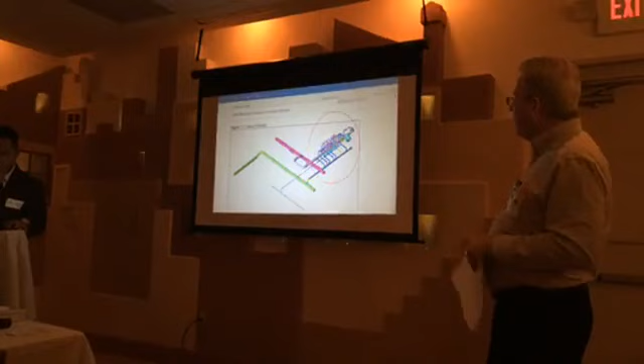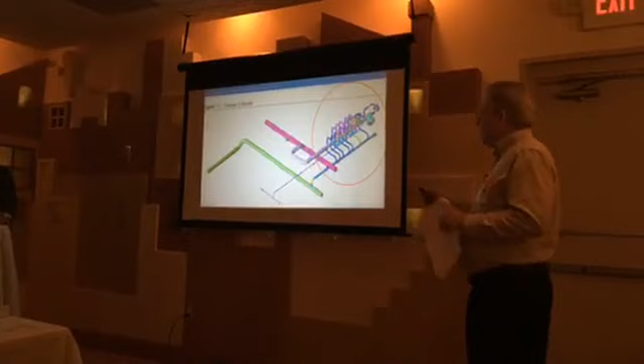So the next slide is showing the system in hand. This is actually part of the compressor system, and it goes to air coolers. It's a very large model. And you can see the PSV is sort of down the end of this. This is actually an end of a header, and then we have this PSV system. So to put that all in the other calc is really not an efficient way to do it. It's isolated. So this is what the system looks like.

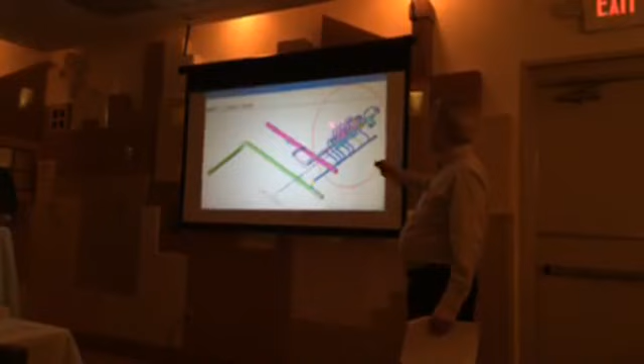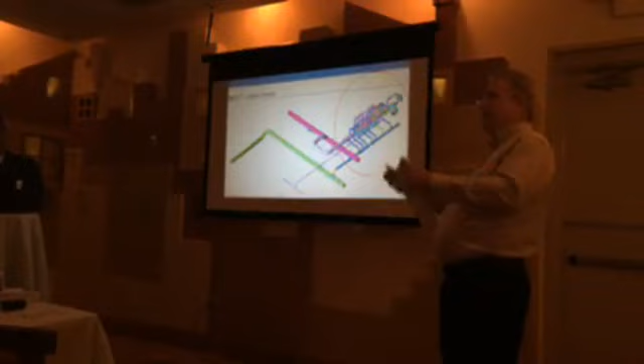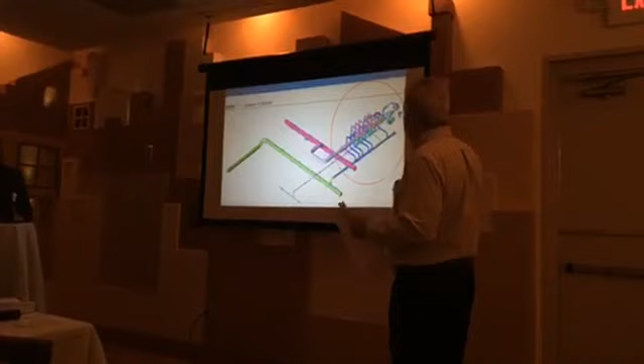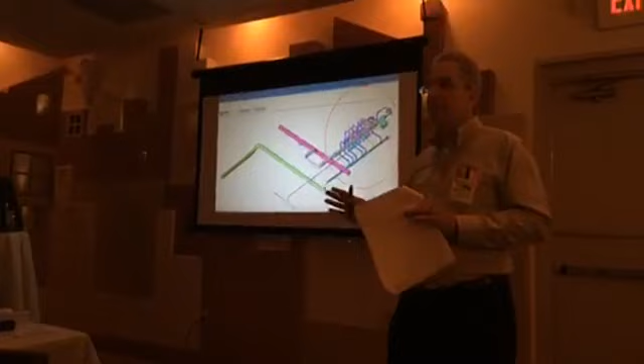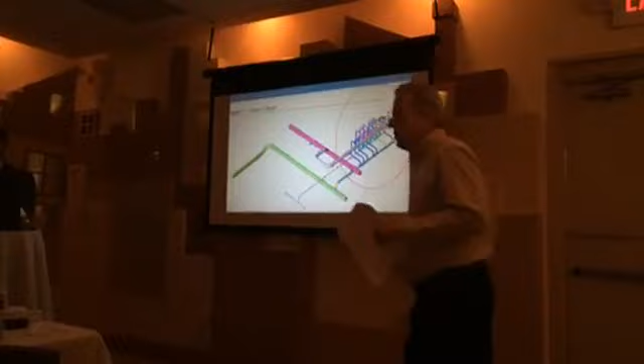And when we talked with Process about that, we said, well, these forces are large. We were calculating close to 20,000 pounds each, horizontal forces. And you got 5 of them, so we're going to say, okay, we're going to give Civil 100,000 pounds up here on the top of this structure. We'll show you some pictures later where it was, and we just don't have this system.

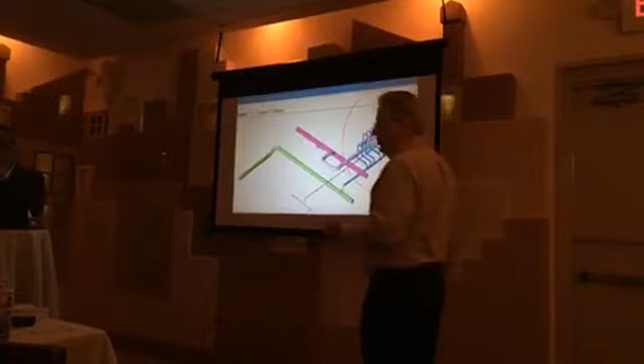We got 3 other ones that are similar. They're not high pressure like this, but the flow rates were the same, and basically the forces are proportional to the flow rate, so it doesn't matter the pressure. So we said, well, then we just talked to Process, and it's a very simple thing. Just walk over, talk to these people. We know these things are staged.

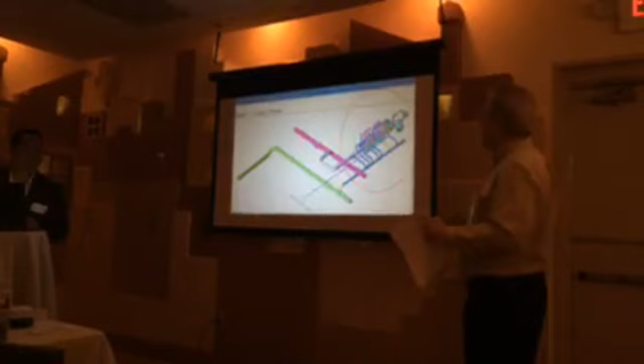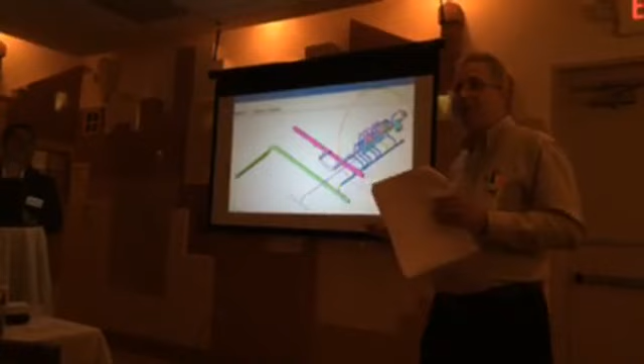The way this has worked is that the inlet pressure was 1100 psi. That's 1100 psi, so it's a high pressure system. It was a class 600 valve. So they said we have A and B that are set at the set pressure of 1100 pounds. Then they can stage it. You know, they have their ways of sizing things.

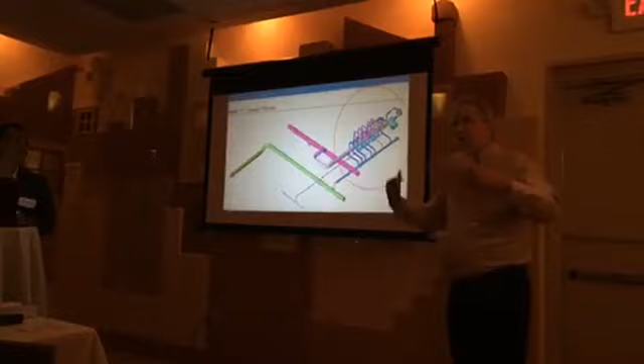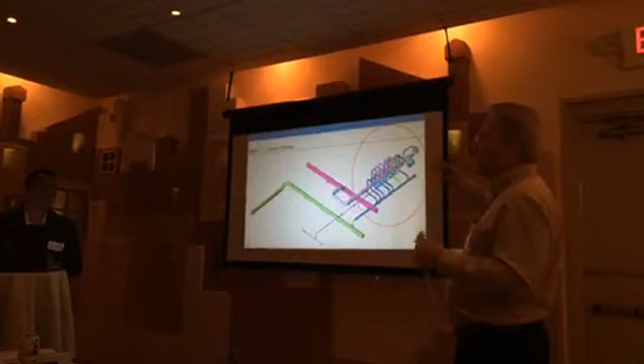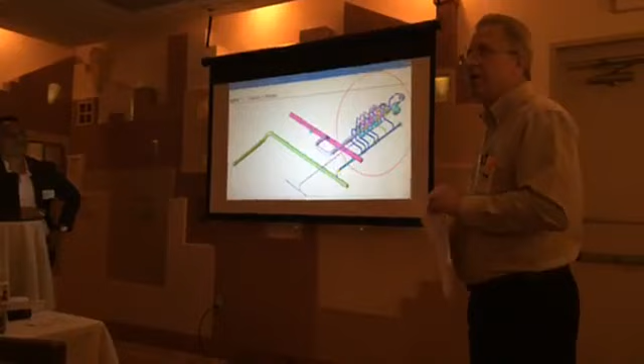And so the C valve was set at 1125 pounds. And then the D valve was set at 1155 pounds. So they gradually step in and they size them accordingly so they can pass the flow to reduce the pressure. And then the E one is set just like the other ones at 1100 psi, and that's closed. They car seal close it. The valves are physically closed on that. So that's what it looks like.

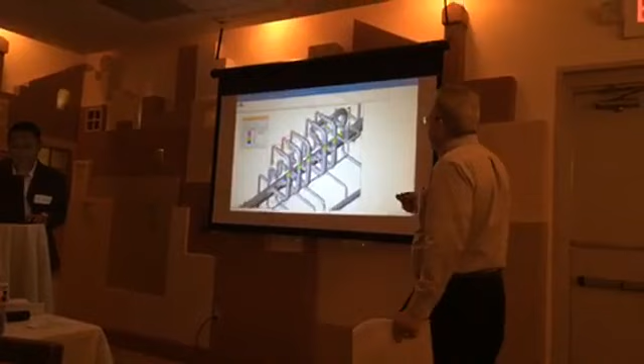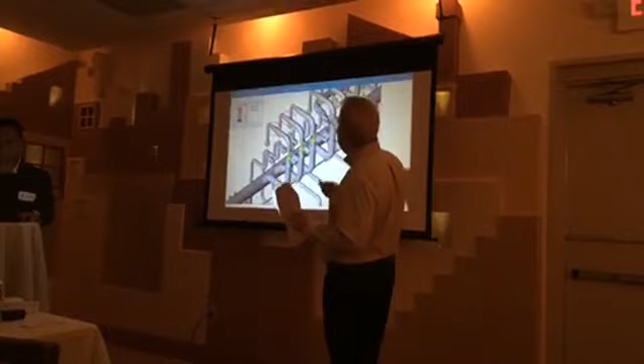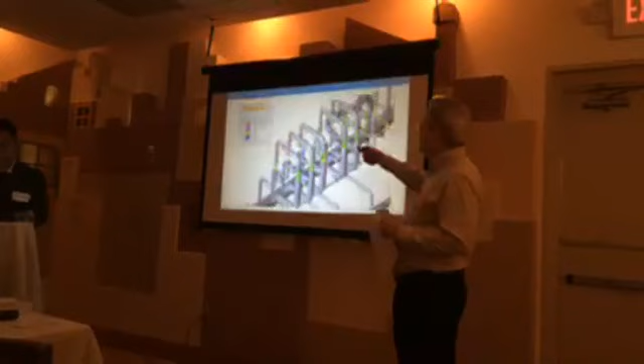If we go down to the next portion, there's a blow up of it, and looks like the circle's got a little shifted, but right in here, this is where we applied the forces for the first load case. I'm trying to show the loads there that we used, about 18,850 pounds. So say about 19,000 pounds was what we decided to use there. So when we ran this one case, we had the two 19,000 pound forces on there. And we treated it like an occasional load. I didn't want to get into all the load cases at this time, but it's an occasional load where we're going to put those on the system.

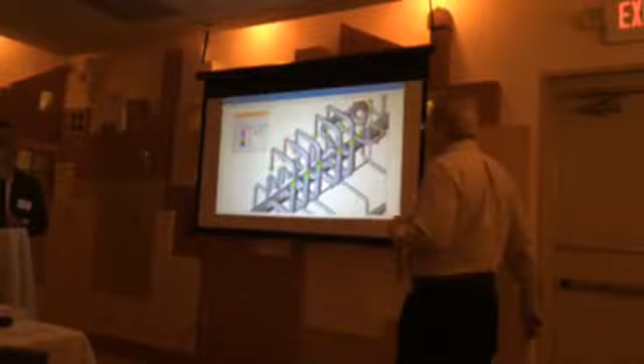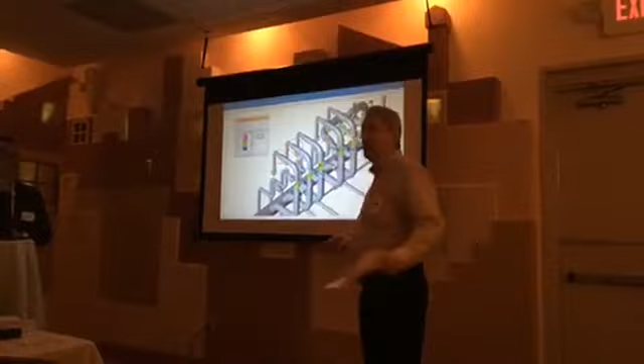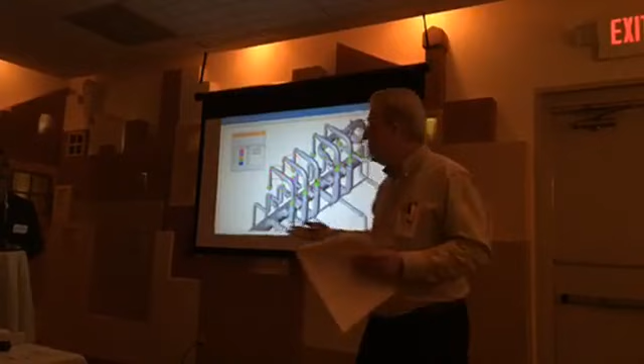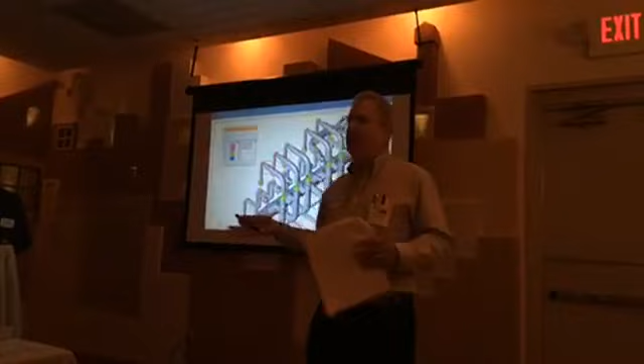And originally, what we've been doing, and a lot of companies have been doing, we got the force at the valve, so we're going to put the line stop right up on the outlet. We started doing that because there's a structure here, they could get over there, put it right in the middle, right in line with this guy. But then these forces are big, and the civils say, hey, what are we supposed to do? They actually built a frame up there, but after you framed it all in and put a line stop there, you couldn't get to any of these valves, so we said that's not a good idea.

So we decided, you can see here if we go down to the next slide, it's just isolating one of the systems from Caesar 2. You can maybe zoom out a little bit. Okay, that's good. And so we put the force up here at the valve, and then this guy, that's one of those large rotation rod options in Caesar. So it's a rigid strut, a very efficient design.

We decided to put a strut around the elbow and put it here, and then we went right to the column line, a very clean design. And these struts can take a lot of load, even in compression, which this is going to be in compression. So that's how we modeled it. And you can see you have a little trunnion on the inlet side with a little guide on it. You have a big old trunnion here because this was stainless steel.

Pipe, which was fairly thin, and then on top of that we got a whole bunch of new things that came out. We got FIV, flow-induced vibration, because there's a lot of turbulent flow, so now these specialist groups say you've got to design this thing for FIV. They say, well, by the way, there's another thing, it's called AIV, acoustically induced vibration. Now we're sort of making jokes about it, but these things can actually happen, where the acoustically induced vibration is where the pipe vibrates circumferentially because there's just so much flow in there, and then very quickly things can start to crack. So that was an AIV line.

So the criteria now, and even in the past, is when you have branch connections, you have to use sweepolets, nice smooth connections, and also if you use a trunnion, it has to be a full encirclement. So there's a lot to these types of things, and so we said we don't want to put any more welded attachments because they're very involved. We're just going to use a clamp and a strut, and that's what we did.

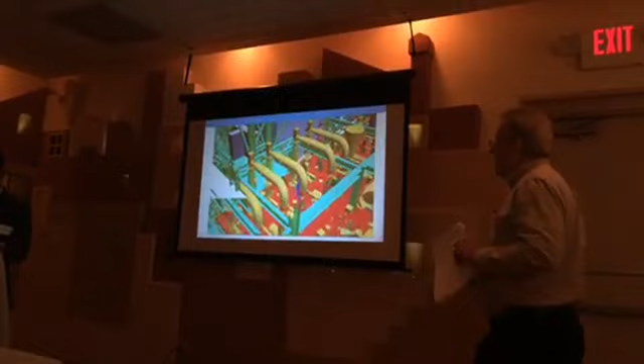Now the next picture will just show what the physical model looks like in PDS. It's the same view that we have there, and you can see these struts, we squeezed them in, and here it's right on a column line, so it was fairly easy for civil just to put a beam up there. And there's even some around the corner, we lined it up at the same elevation, and there was another system right around the corner doing the same type of thing.

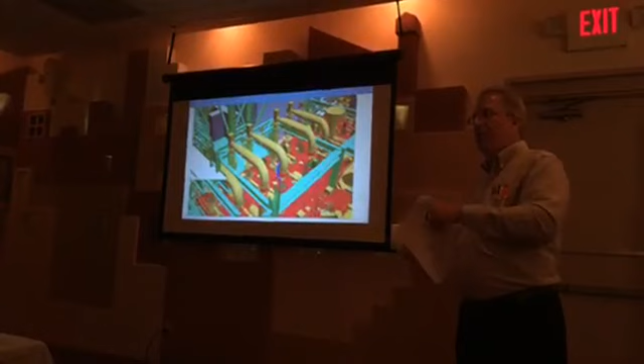And then there's other things too that are a different situation. There's HV valves, and then there's also blowdown valves that they can use to just manually dump the system, versus a safety issue with these. So that's what it looks like. We still haven't got to the forces yet. So let's go down.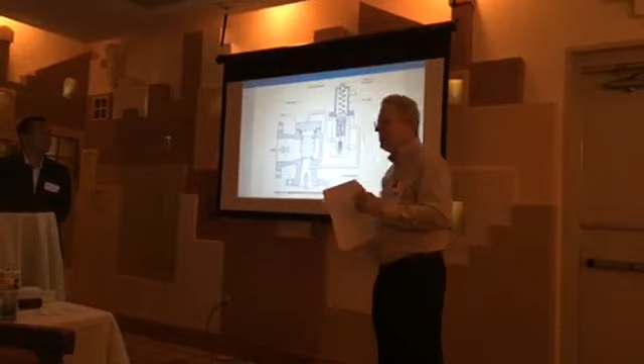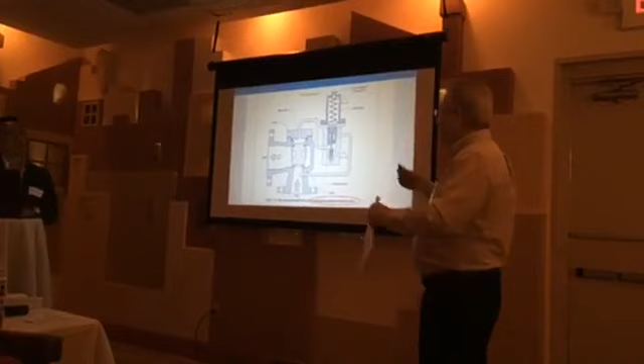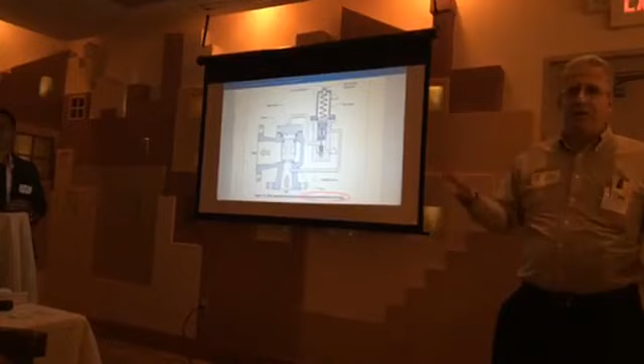This is a little different, and it's actually a very nice design. They have these pressurized lines that go onto different areas. When it's under pressure, this line comes around, and actually the pressure from the line seals the valve. It's just a balancing type of thing with pressures and areas. That's right out of API 520. That's a modulating pilot-operated PSV.

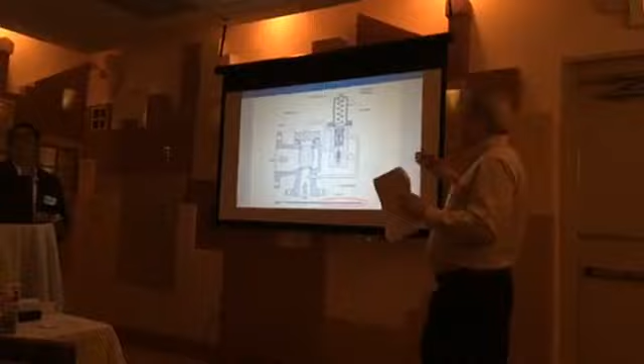So it's actually a much smoother thing. When it operates, it just moves what it needs to release. It doesn't pop open like the other ones. So it's a little different type of valve. And we go down, there's some more pictures of the valve, showing the three conditions: fully closed, starting to open, and then fully open, and there's different colors for the pressures. That's straight out of the catalogs from Anderson Greenwood, which is now owned by Pentair.

And during the discussions, we had the people come in because we were asking them, is there any test data for these things in a closed system? They were looking at us with a blank stare. What are you talking about? We said, well, they must have done some kind of test on these, and when they did the test, did they really have to restrain these things?

And they said they've only done tests usually on small valves, which makes sense, because on these big valves they can't generate enough flow rate to simulate what happens in a real plant, because they just have an air tank, or maybe sometimes steam, and they usually do it on an open system also. So they really couldn't help us on the testing side. Okay, so that's what the valves look like, and now we can go down to the force calculations.

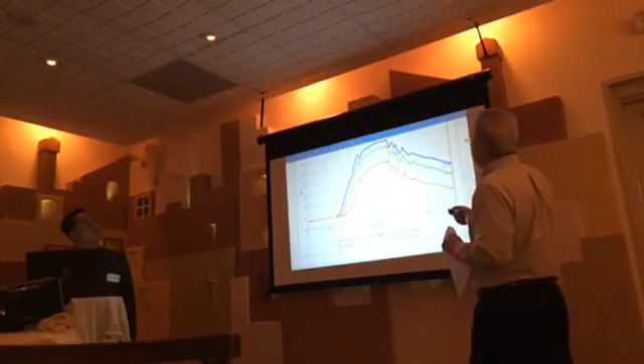So you can see the peak happened at about the 182nd second, which is the 3-minute mark, minus where you started, the 1-minute mark. It's about a 2-minute thing to get to the peaks. And then you can sort of see when the next valve opens. It's not immediate, there's some time in here, and then the final valve opens, like that.

There's no pressure. And I talked with one of the LNG experts. Oh yeah, when these things go, there's so much volume, you're not going to get any pressure in there. He said, you didn't need to see this. So it's sort of understood.

So sometimes some companies are saying use API 520, just momentum in a closed system. Others say, oh no, you got to do momentum plus the pressure. The pressure is definitely out. Momentum, well, we might need a little more work, but we could see that the change of momentum still is not that significant.

And the last slide is just the process simulation done using UniSim, and this is one of the examples. It can do many things. He says it can be used for emergency depressurizing of flare systems. And actually for the ethylene plants, they're only doing basically the flare system to help confirm resizing the flare system. They're not doing the whole plant like they did on the LNG. And you can also use it for compressor and surge control, which is very critical on these machines in the LNG plants.

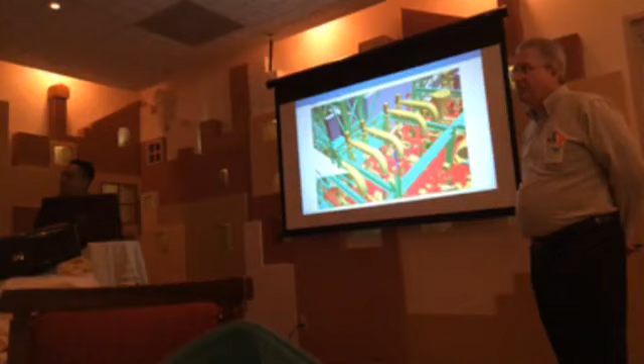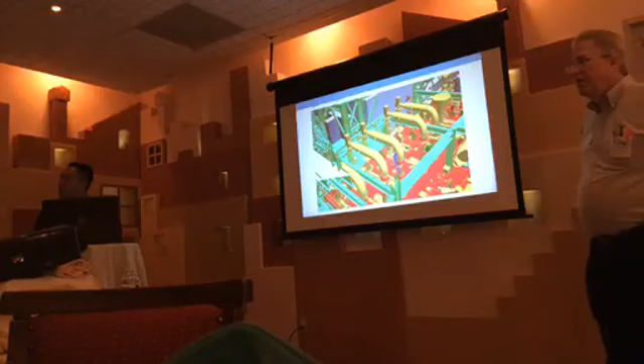Yes. And one second point that needs to be mentioned on these valves: it's critical on the outlet side where you have reducers to follow those so-called rules of thumb or guidelines of having so many pipe diameters away as you transition up. You and I were in that meeting with that valve vendor, and he had various control stations up there with different configurations, and he could literally, just looking at those configurations, determine which ones were going to be problems. A lot had to do with the expansion of those pipe diameters as you left the valve and how many pipe diameters. The takeaway I got from that was that is the most important thing you have to follow, because if you don't, you're going to run into real problems.

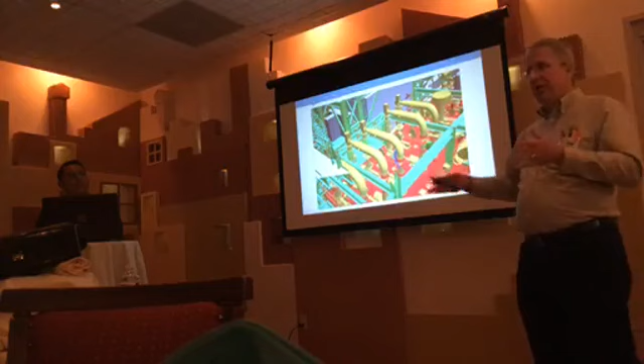And I think you're right, and I think these were for some anti-surge or for these hot gas bypass valves, or in general we've had discussions and actually implemented for these letdown valves, because when you have these big pressure changes, letdown valve PSVs, let's get some straight run in there, but treat it sort of like a meter run. Go 10 diameters, something like that. And the process can help with some feedback too.

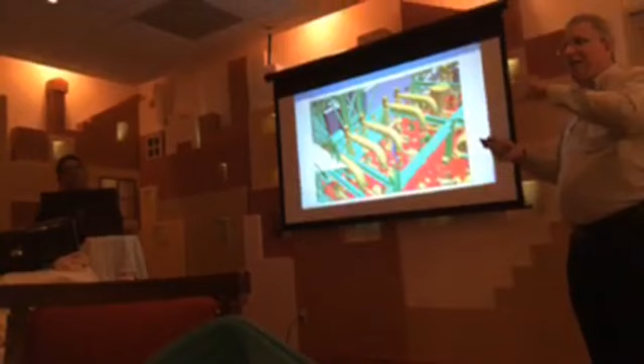But you can see, traditionally on the PSVs, they're always sort of like this. They come out and you just go down and go your merry way. Although on, like I said, these ethylene plants, we usually have two types of headers. We have a cold and a hot flare. So some of the PSVs are coming from both sides of the rack. They're just lined with them. And sometimes you're going to the far one, and sometimes to the one closer. You're not really going down.

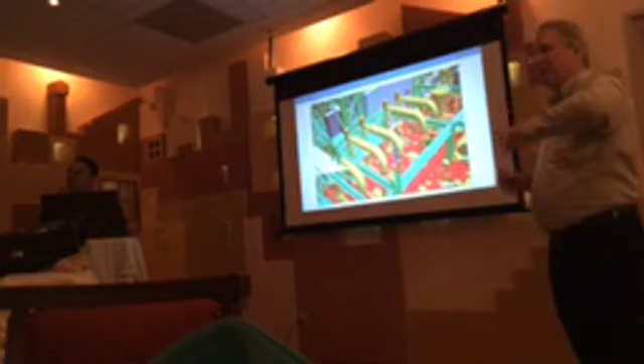You're just going over and in, and then trying to work out the flexibilities and those kind of things, checking those types of things. But yeah, obviously, if you could develop the flow a little more, it's going to calm everything down even further, which is good practice. But nowadays, it's a little bit of a hard sell. But on these letdown valves and stuff, it's sort of getting into the practice now where you have to have these diameters.

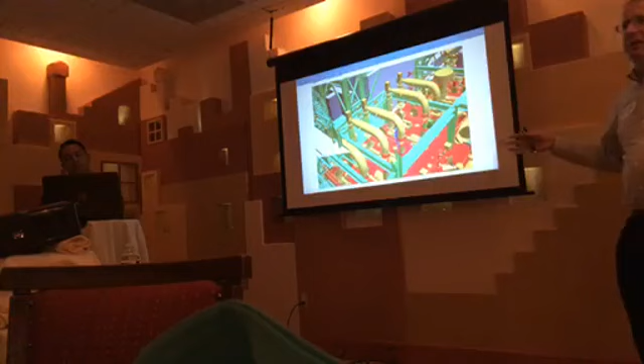For a while there, the pumps all used to be very tight. And now they're saying, nope, you got to have your 5 diameters in front of the pump. And now everybody does it. And I think on these other things, you just got to start implementing it. And it is a good practice. It'll alleviate a lot of problems. You don't have to do any calculations. You just know it's going to be calmed down. There's not going to be much vibration.

And it's probably important too that during startup, if you have the opportunity to be out there, it would be good to look at these kind of systems, because if you're in the control room, you can talk to the operators and say, give me 20 minutes, I'll be down across from this area. You know, create a situation where a couple of these valves can relieve. You can be there looking at it as it takes place.

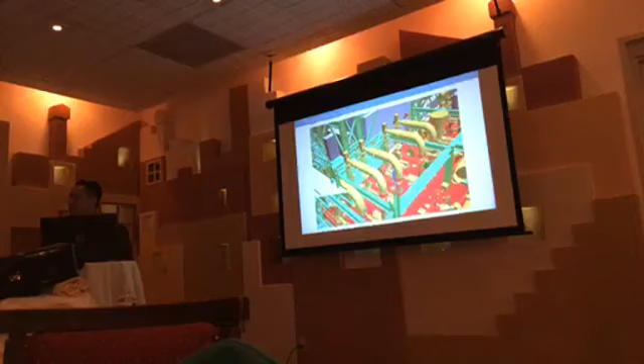That type of information is invaluable when you come back to the office, because then you can say, hey, I was out there during an unbalanced situation at a startup condition, nothing happened, yet we erected this monument up there with all the steel. You know, you could have saved the company a lot of money. So it's important to be out there if you can convince the right people to be out there during startup, and not just simply the process people. Because it's definitely a learning experience. Yes.

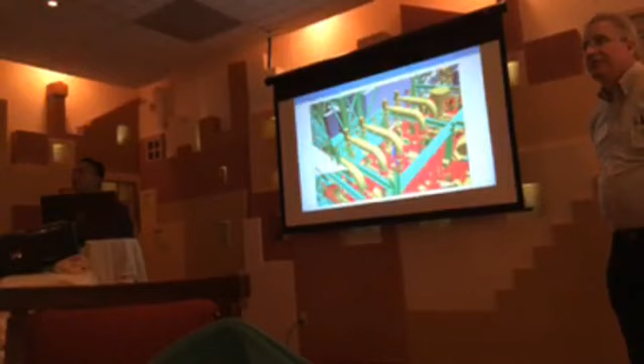Are there any other questions? All right, thank you. Okay, well. All right.